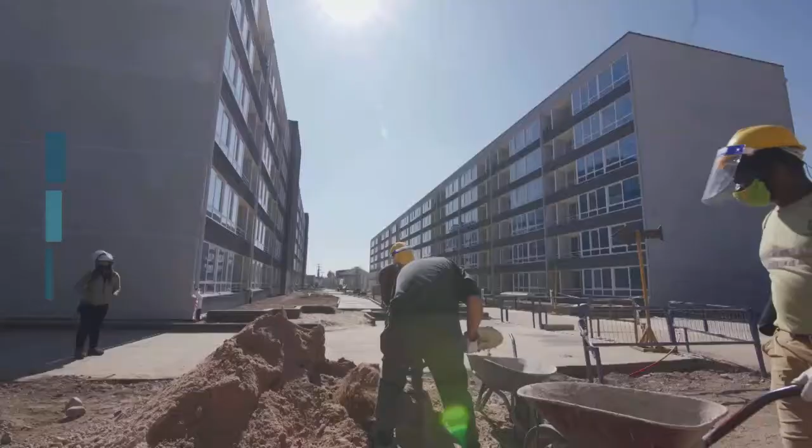The industry of construction is going through a process of change where both technology and more collaborative ways of working have a key role in facing the challenges of productivity in our sector.

That is why it is crucial to understand that we cannot achieve change without investing in updating the skills of our labor force. Both academic institutions and companies must focus on the competences, skills and challenges that lead us to Construction 4.0.

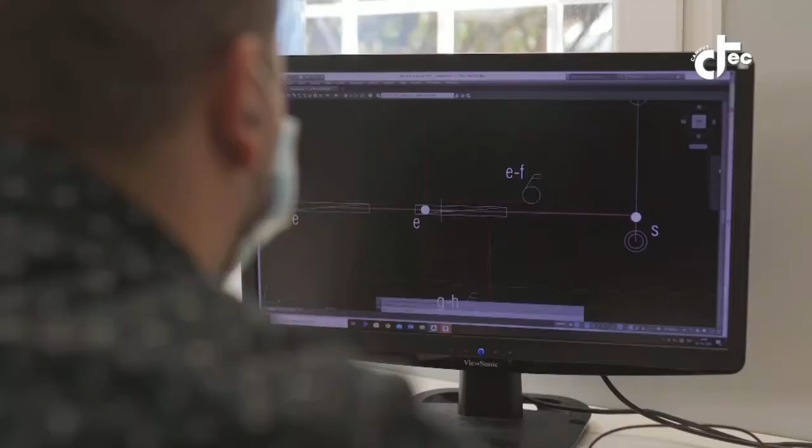This allows professional and technical staff to use technology to their favor, changing the way we currently work towards an innovation and ongoing improvement model.

We hope we can provide the leaps so we can train specialized human capital. Universities have a key role in this, including building capacities for innovation, development and professional training.

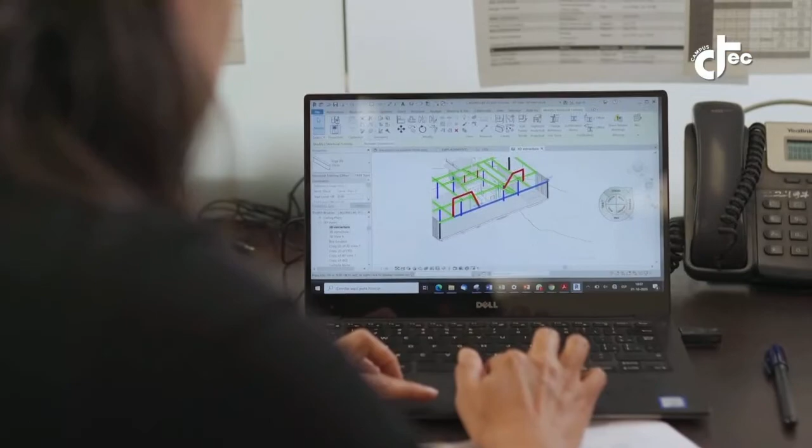The seven universities that make up this consortium are prepared for this change. I think it is a motive of great satisfaction for all of us.

The construction sector has a serious problem of productivity, and this is due to the low levels of training in the sector, both for workers and professionals.

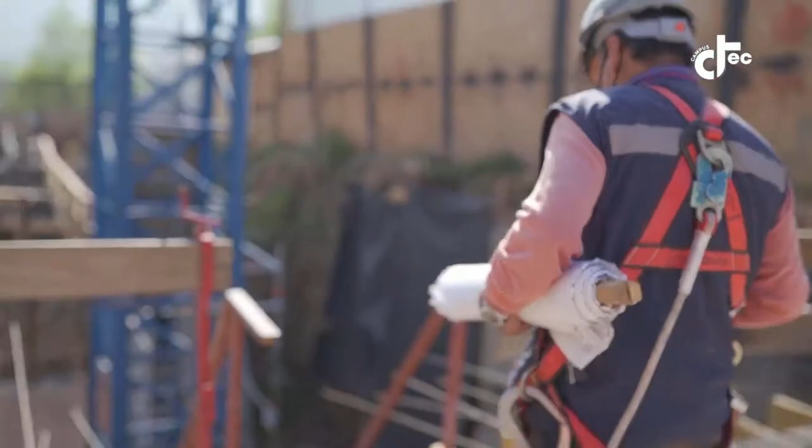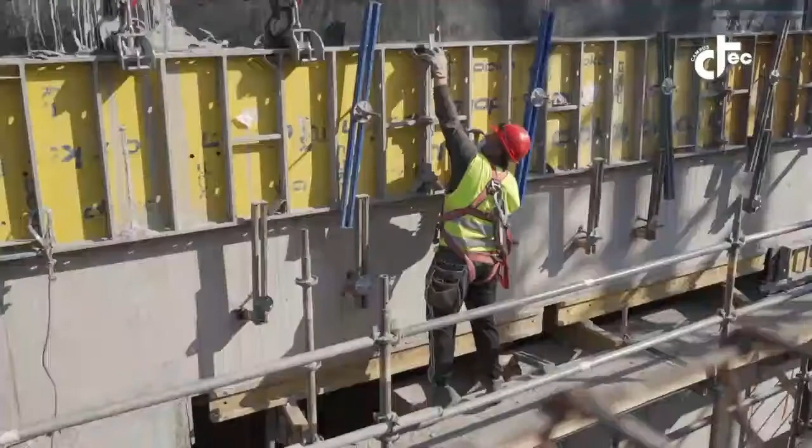In that regard, the Campus CTec initiative adds to a new program we're generating at the Chilean Chamber of Construction, where we want to offer partner companies different methods to generate ongoing education and training in different fields.

This will let us progress in productivity, industrialization, digitalization, the incorporation of new technologies, in the construction sector.

Through training, specialization training of high technological value aligned with the construction sector, to drive digital transformation and circular economy. To contribute to the challenges the construction industry faces in the years to come, CTech offers the sector a learning platform.

CTech puts at the disposal of the sector its learning platform, the CTech Campus. So I'd like to invite you to be a change catalyzer and be part of this.

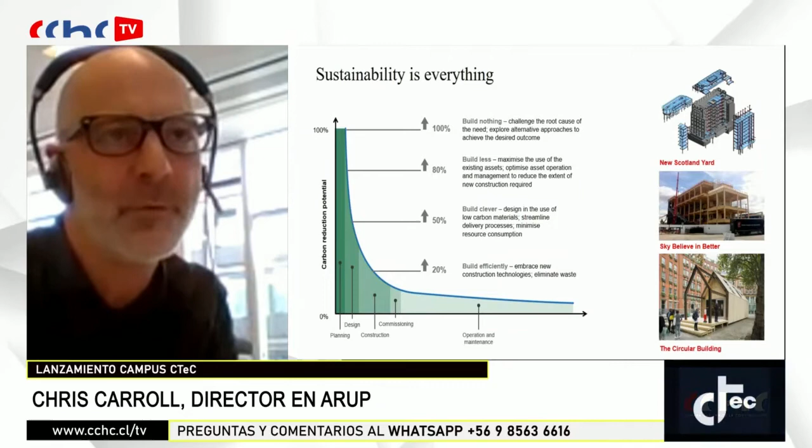Globally, buildings account for more than 38% of global emissions through the materials used to build them and the energy used to operate them. So this is a significant contribution that we need to make, and we have to start to think about different ways of doing things. So the concept of circular economy, which is where we keep materials at their highest value for the longest possible time - we have to start to think about this. Not just using materials and discarding them, throwing them away. We have to think about how we design to keep materials and resources in use, in perpetuity.

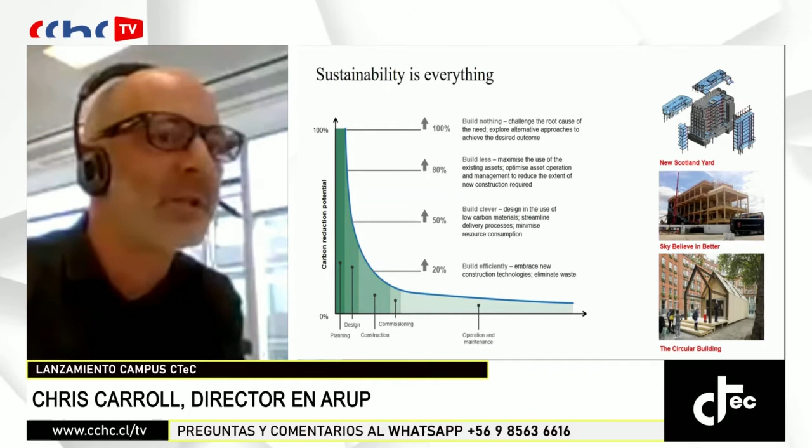So I'm a director at Arup, leader of one of the building engineering groups here in London. I've been at Arup since I graduated, so I've been here 30 years, and that's primarily driven by the type of firm we are and the type of projects that we get to do, and that's what's kept me here for so long. I'm a fellow of the Institution of Structural Engineers, and as per the introduction, I also am taking on a bigger sustainability role within Arup, as partnership director in relation to our membership of the World Business Council for Sustainable Development, which is a members organisation looking at how we decarbonise our building projects.

But the core thing I would like to say is although I've been here 30 years, the thing that keeps me here is the projects that we do and the collaborators that we work with, and being able to continue to innovate and create new projects year on year.

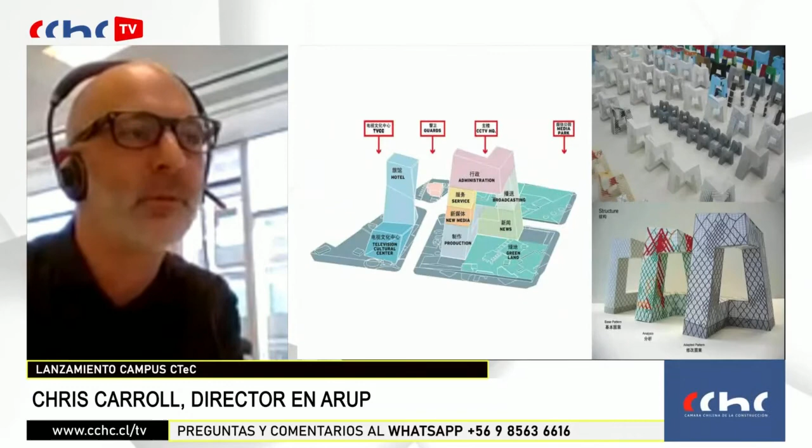One of my major projects, and I'll show some other examples, but one key example that really started me thinking about digital technology, innovation, and how we use that going forward, was this project in Beijing with OMA and Rem Koolhaas, the architects. It was for a new television center project campus called China Central Television, where it was 500,000 square meters of building - everything you need to produce television all in one building - and to be able to engineer it, these two towers of 54 stories high, connected with a 15-story linking piece that cantilevers 60 or 70 meters.

And to deliver this building, we had to reimagine what a building was about. So we had to look to use the whole form of the building, all of the geometry of the building, to provide strength and stability and hold the building up. But we also then had to look at using computing power to assess the way the building was performing in seismic and wind conditions and under its own loading conditions, and then tune that to put the material where it worked at an optimum.

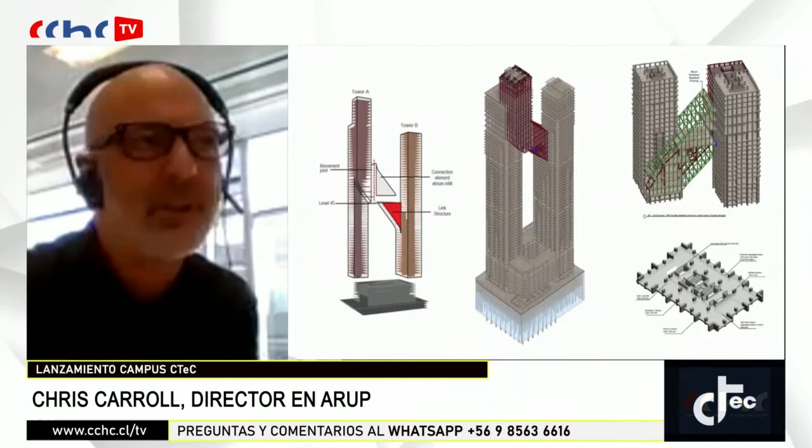The key thing here was to get that diagram right, so you limit the complexity. The form looked incredibly complex, but by cleverly thinking out the diagram, we could limit, understand, and ultimately simplify that complexity. On this building, we contained the complexity to the bridging link, and the rest of the tower we were able to deliver using very traditional Chinese construction techniques.

This is another Zaha project, which I think Loretta will also talk about—a science and research center in Saudi Arabia, KAPSARC. The important thing about the form of this building is that it's driven by the concept and a strong concept, and I think this is an important aspect of launching into any project.

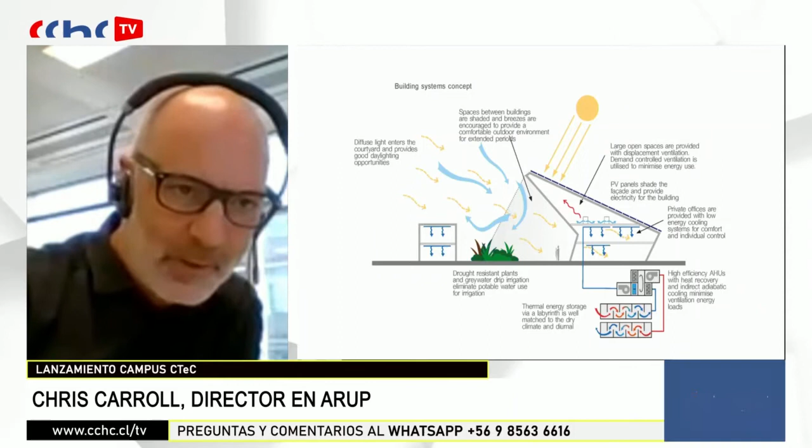This particular project's form is driven by the environmental performance of the building. It's about creating habitable, semi-outside spaces that are shaded. It's about channeling wind, collecting direct sunlight on the most effective surfaces, and energy efficiency. All of that is brought together as a concept and then informs the form, arrangement, and massing of the building.

As part of the design process, we have to fully understand the geometry we're dealing with, and importantly, the interrelationship between different aspects of that geometry. This is a bridge we're undertaking with Zaha Hadid's office at the moment.

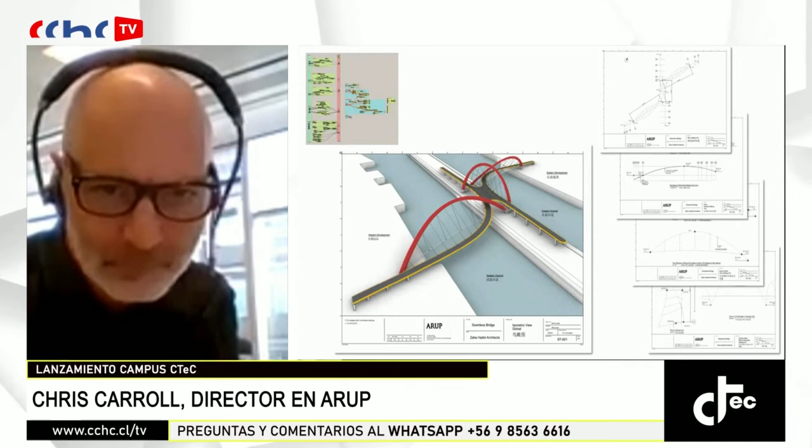The key is a tied arch bridge, and the relationship between the arches, the ties, the cables, the deck alignment, the abutments, and the bearings are all fundamental to its performance and efficiency. We need to control these parameters from the outset and balance their demands to achieve an optimum result.

Here we've used a Grasshopper script, a parametric script that links all of those elements together geometrically. It can then produce a three-dimensional model, which can be linked to our analysis software, which then connects to drawings and more conventional ways of describing the geometry. All of that forms a workflow and creates a rapid loop whereby we can test lots of design parameters in a very short period of time.

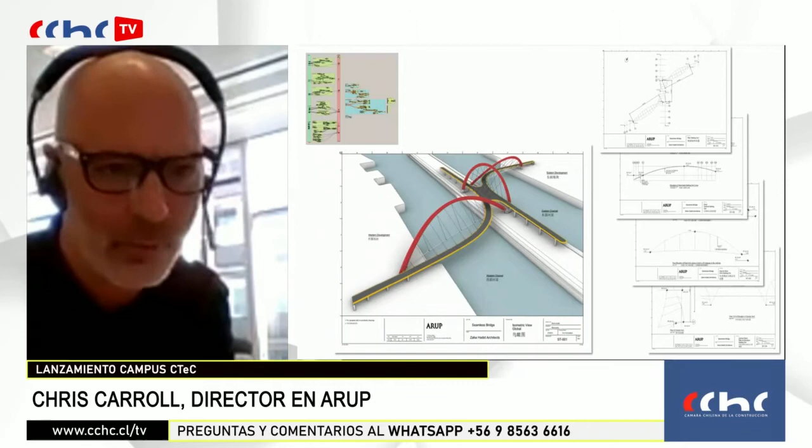We have to use geometry to deliver value. This is a project with Rem Koolhaas in Berlin that I worked on, with a very large glazed atrium. To put conventional glass systems into it, or to span the 30 meters to form that atrium structure, would have been very inefficient. So we adopted the form and made a kind of corrugation to reduce the material and make it more efficient. Again, software was important for that optimization, but the key thing was having a good concept and getting it right before we started the optimization process.

And how we bring all of this control of geometry and computing power to improve construction quality.

We've got to start to look to take as much of the construction process into a more controlled environment, so off-site, basically. Sites are pretty messy, uncontrolled situations, weather conditions, all that kind of stuff. So the more that we can build in controlled environments in factories, the better the quality and the construction process will be.

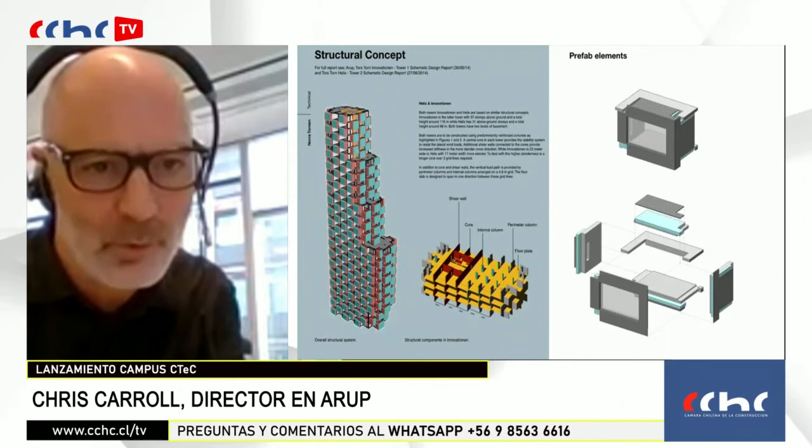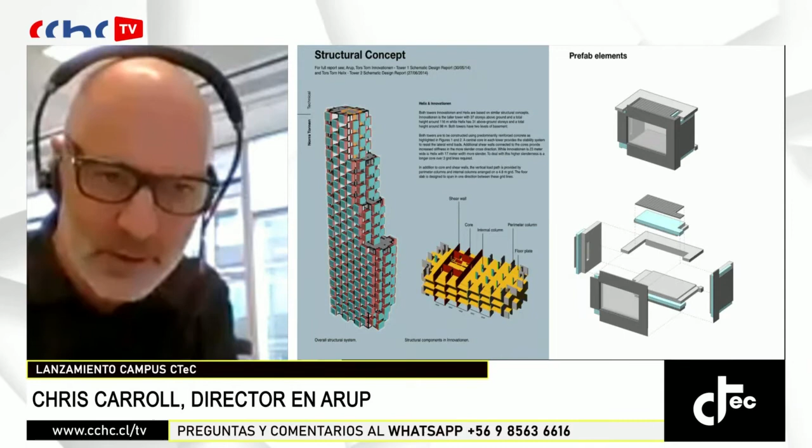So we worked out from the start how to make a structure and a facade from a modular panelized system of precast concrete pieces. The structure, the slabs, the beams, the columns and the walls are all precast, so we avoid any kind of formwork. But importantly, the facade also comes as an insulated precast system already glazed, and we worked out the precision of this.

Another aspect of delivering these projects is collaboration. There was a collaboration with the contractor SCF Beton and their engineers. We worked very closely with them to work out all the details, reviewing everything to make sure they delivered the structural performance and the continuity of the shear walls, and we worked out how all of this could be built as a series of prefabricated pieces, analogous to a Lego set.

Here you see the project on site. It was incredibly fast and efficient construction, with very few workers on site. This is a working day, and you see hardly any operatives as the panels come straight off vehicles and are assembled on site. They were cycling one floor of construction in less than 5 days, and importantly, that wasn't just the structural frame, but a fully insulated and clad shell in 5 days per floor.

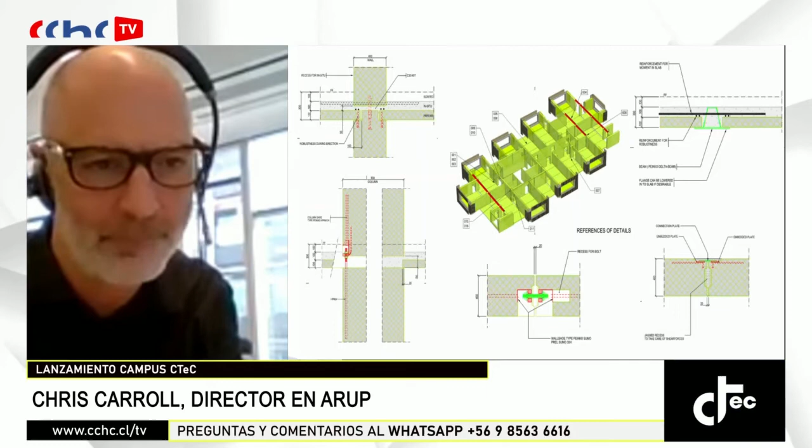There you see the construction and how clean the site is, with the parts that fit together. Very little site operation at all.

Now you see the two towers complete. The second tower was even quicker to construct than the first, and the idea that building is a process and not a one-off bespoke activity is something we should consider. There was a definite efficiency in building the second tower compared to the first, as the contractor learned the process and optimized it.

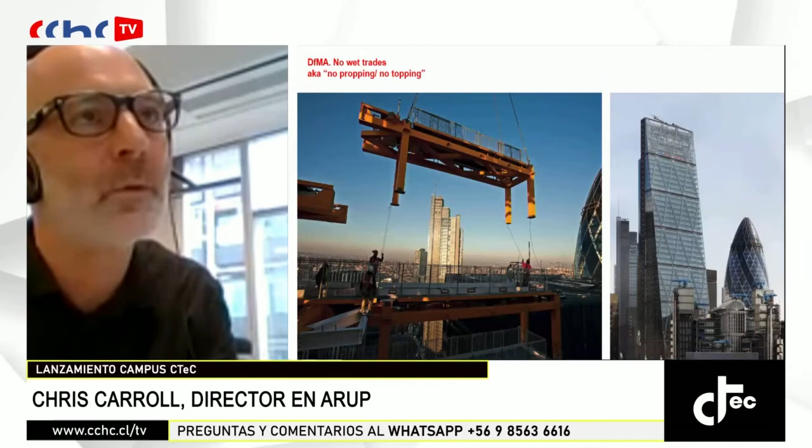This is a project in London, Leadenhall, also known familiarly as the cheese grater, built with the contractor Laing O'Rourke, whose philosophy is based on constructing as much as they possibly can off-site and bringing it in. They have a phrase, no propping, no topping, where they try to modularize everything. In this case, steel and precast concrete, and there was no poured concrete at all above the fourth floor.

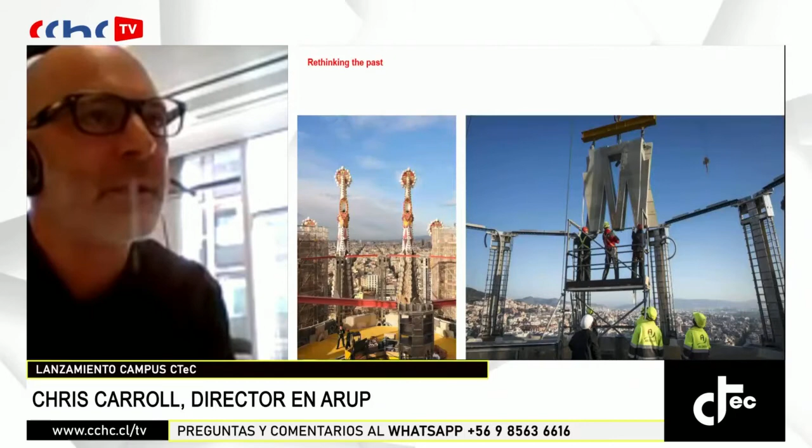This is a further example. We're also working on the Sagrada Familia refurbishment, and they want to speed up its final construction. It's in Barcelona, and it has taken 100 years to date, with a goal of finishing it within the next decade or so. They looked at using in-situ concrete as a way of speeding it up, and we've worked with the stonemasons to work out how to modularize traditional construction using post-tensioned and pre-stressed masonry units that can come onto site as a unitized system, be lifted into place in one action, and then grouted together.

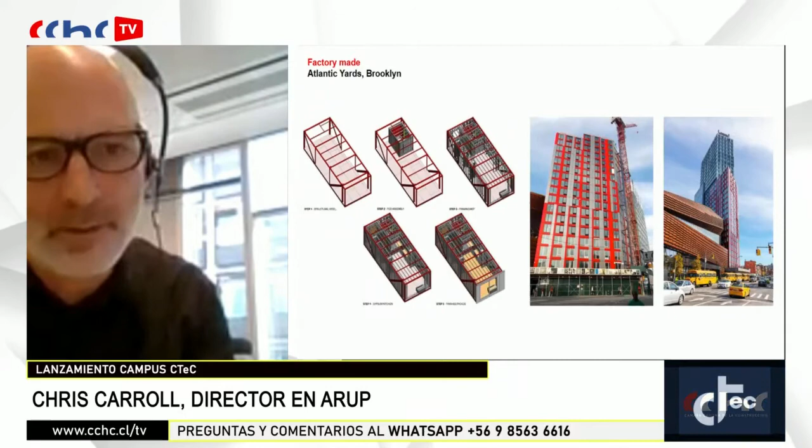Modular building taken to its full extent would be volumetric modules. This is a project in New York, which was for a time the tallest volumetric modular building in the world. These modules are fully fitted out in a factory, brought to site, and installed.

This is the BLOX building in Copenhagen, with the client Realdania. It's an interesting project in terms of how we think about the building grid, which is usually an arrangement of orthogonal frames made from beams, slabs, and columns. But this was a key city site that had been undeveloped for 60 years, as it was too complex a site.

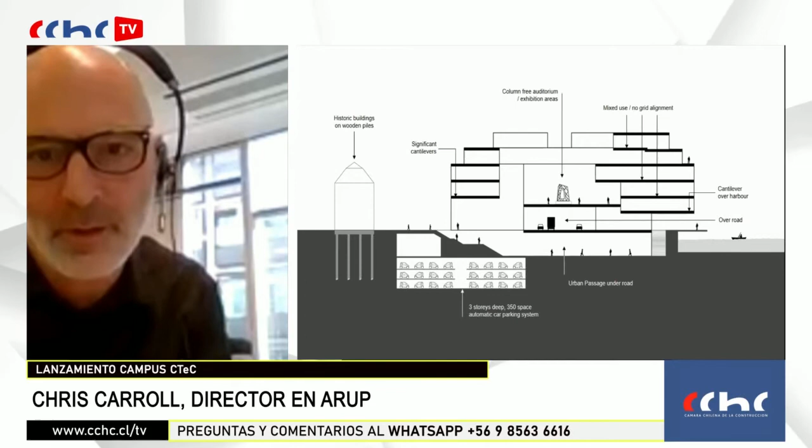It had many planning constraints, being in the historic part of Copenhagen. The building went underneath the ring road, over the ring road, and cantilevered over the dock. As a planning requirement, it had to have 350 car parking spaces, which meant an automatic car parking system. All of this led to a very limited number of places where we could put columns and a high level of complexity.

So again, we need to start with a basic diagram concept and get that right: simplify the complex and reimagine the grid.

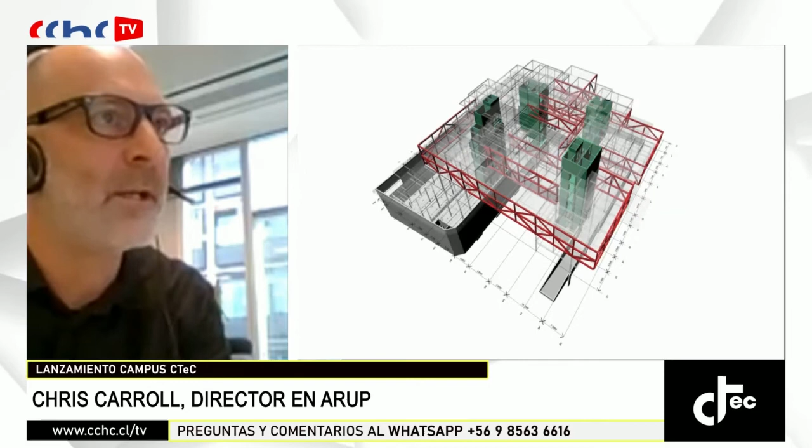We did that by coming up with the idea of 18 story-high trusses that occupy the building but create a framework allowing the rest of the building to be constructed using conventional techniques. These 18 trusses allowed the rest of the construction to be vernacular, adopting what the contractors were used to delivering.

To realize that, we had to use the full extent of the technology available and think of everything again. We simulated how we would construct the trusses virtually, so we could assess the stresses locked into them, and work through the construction sequence with the contractor.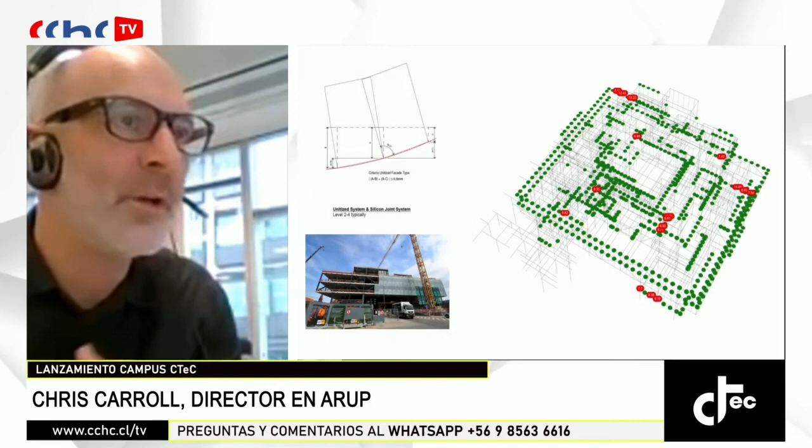We had to work with the facade contractor and write some specific bespoke software, a script that plotted all of the relative deflections at all of the gasket points under the different load combinations. Otherwise, the very large 4.5 meter high, 3 meter wide panels of glass wouldn't have fitted onto the building. So we had to adapt our process and write specific software for this project.

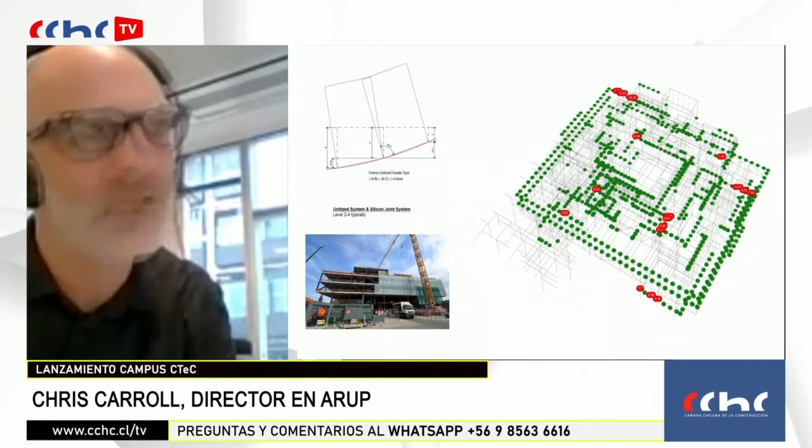We had to consider everything - how the fit-up of all of these complex load paths worked, how the tolerances were managed. All of that had to be done via virtual simulation of the actual conditions.

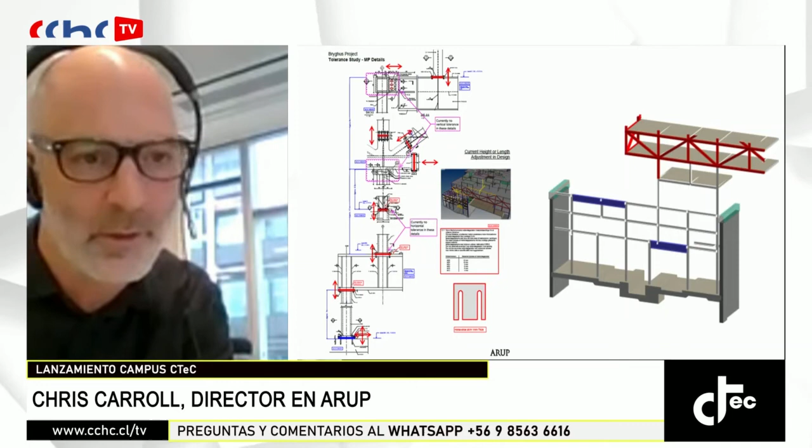Again, thinking holistically, as part of that concept we figured out how the environmental aspects of the building would work, how it would be a low energy building, how it would utilize the materials, daylighting, and as much free cooling from the district system as it could.

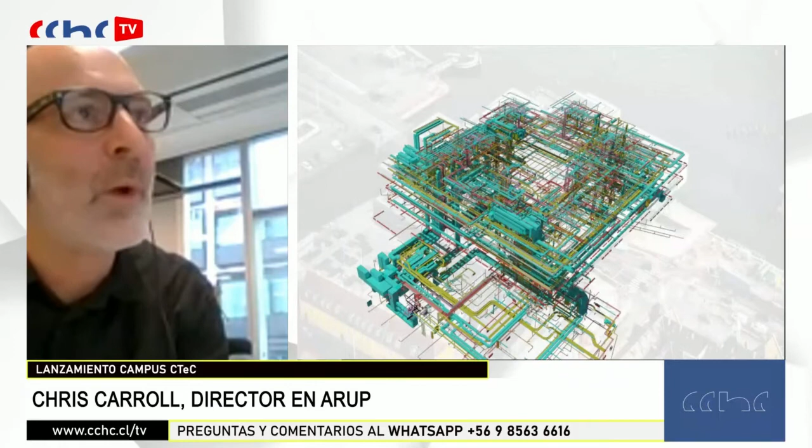The only way to realize this level of complexity was through BIM and a virtual twin of the building. We modeled every single pipe, cable, and wire, and their interaction with the structure, and how that all comes together in the building form.

This is the last project I'll show, but I show this because of the growing importance of technology and a higher level of technology in the built environment. This is 181 Fremont in San Francisco, a high-rise office tower, 800 feet tall.

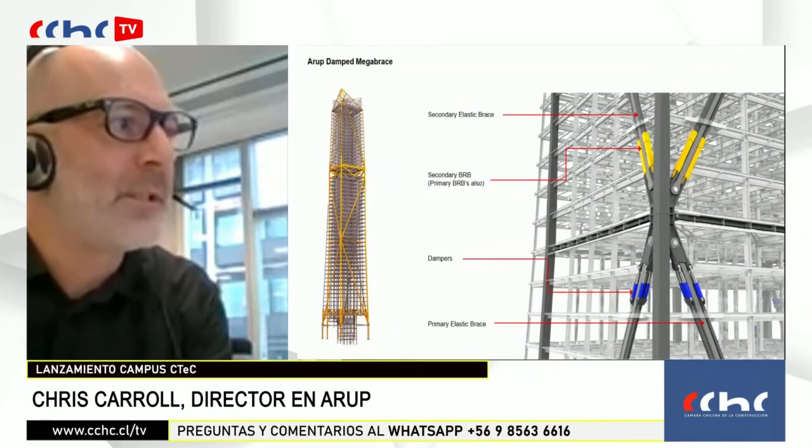To realize this tower in an efficient way that saved thousands of tons of steel, we looked to employ damping technology and energy absorption, using performance-based design rather than prescriptive code design, and engineered the building from first principles.

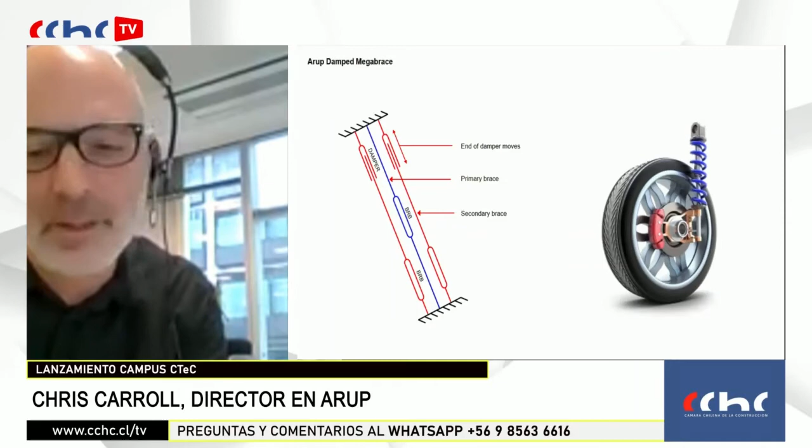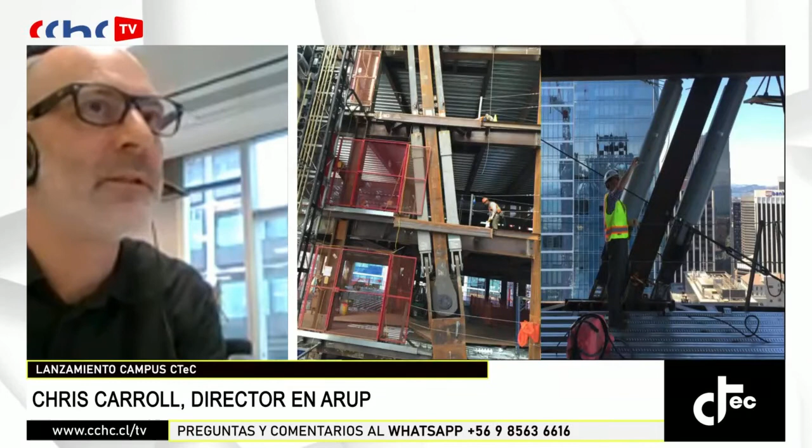We adopted the principles of a car suspension system in relation to how we would absorb the energy from major earthquakes. And that's the dampers in position.

We also employed lessons from the 1,000-year-old pagodas in Kyoto, Japan. The reason they survive is they rock on their foundations and lift up. So it's about thinking how you can deploy that ancient technology on a modern project. This building is designed to lift at its corners, but lift in a controlled way, and that again absorbs a significant amount of earthquake energy.

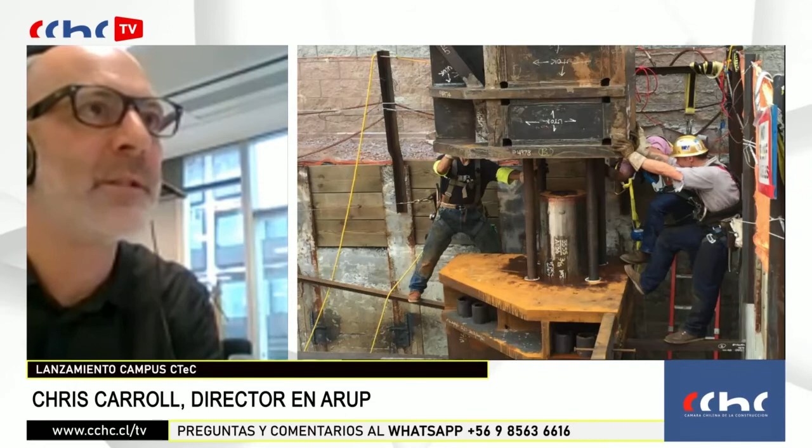And then you see the bearing at the base of that column. Next slide. And all of this is only possible because of the way we can simulate, in an accurate, non-linear way, how these materials and devices work in major events like earthquakes.

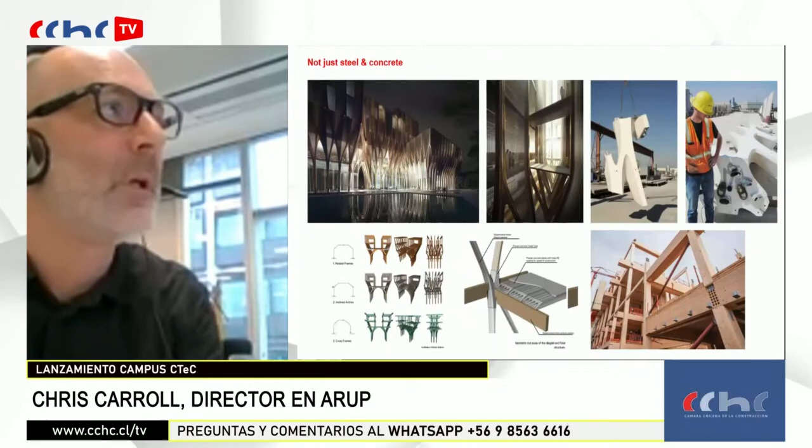Next slide, please. And finally, everything I showed was steel and concrete. Steel and concrete are the predominant materials in the world today. I read that we build a city the size of Paris every week globally, but maybe we have to start looking to use much larger quantities of other materials, maybe timber. This is a project in Cambodia we're doing with Zaha Hadid, looking at making a bespoke timber frame. The bottom right corner is a project we've done here for Sky, the television broadcasters, where we created their headquarters in a year using timber frame.

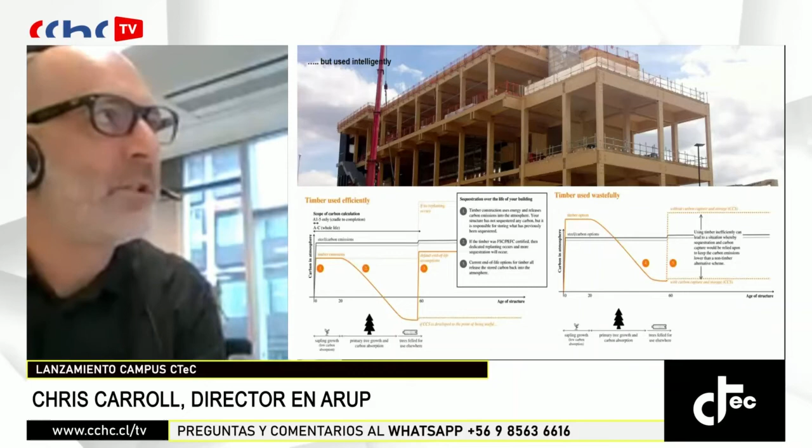Next slide, please. But it needs to be used intelligently. It shouldn't be a gimmick. Timber used badly can be worse than using steel and concrete. Also, if you don't consider what happens at the end of its life, timber in a landfill gives off methane, and if it's burned you have to think about the whole life cycle. So we have to use new materials intelligently, not in a gimmicky way, and probably compositely with a selection of other materials.

Last slide, please. So I'd leave you with these takeaway points, and you can make your own conclusions. From our perspective, sustainable development is now everything, given where we are in the world. I embrace the full potential of the digital era, but don't forget the clear diagram, the principles, the fundamentals of what you're trying to do. Keep exploring and enjoy the process. Thank you very much.

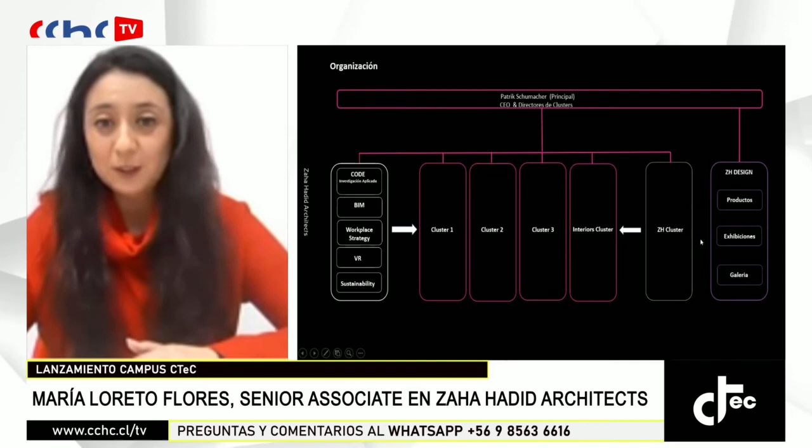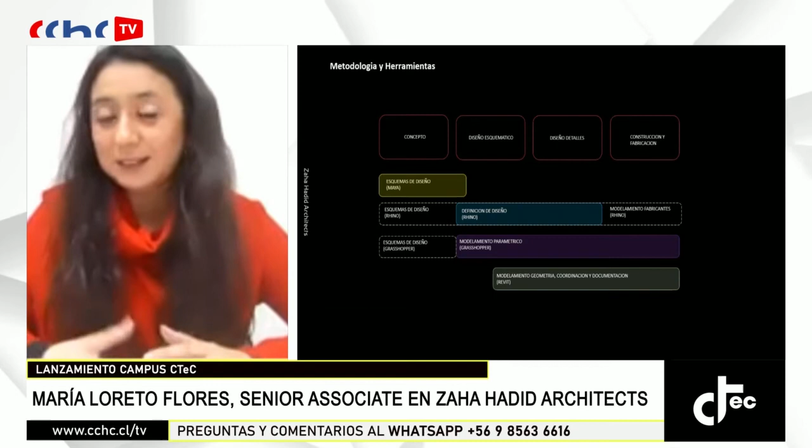And we've created some examples, and I believe we'll progress, and it's part of what the tool is enriching. When we create our own tools or definitions, many times we will provide them to the software for them to be included and for other people to use them.

So in general terms, the conceptual part is in our hands, and the local architect and local consultant provide us information related to the site, the place, and the regulations. But when the project is in the design stage or construction stage, of course, our local partners are the ones that require more responsibility in terms of the project.

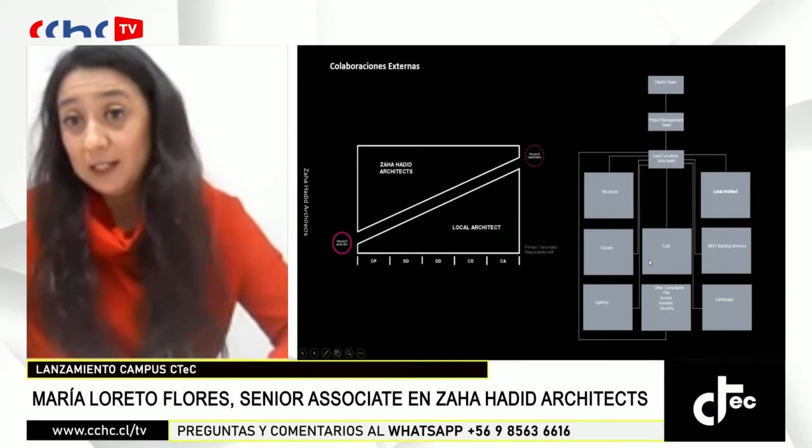In terms of organization and how we work with different projects, there are different modalities, but what we generally use is that after the customer and the manager of this type of customer hire us as lead consultant, and under our guidance, the rest of the consultants could be structural engineers, facade and illumination engineers, cost consultants, landscape artists, and the local architect. But that depends on the type of project and type of relationship the customer wants to include.

In terms of global collaboration, this is one of the models we're looking at lately in projects. This is the case of Morpheus, a project which I worked on since the beginning of its construction.

It was a global collaboration with teams in different time zones. We held meetings one time a week remotely. Part of the team was in Los Angeles, another part in Europe, in London and Belgium, and all the constructors and manufacturers were in Asia and China, which helped much in terms of mobilization.

In terms of innovation, the other component of these capacities needed using digital media. What is the advantage of using digital tools? One of them is optimization, in our case, of complex geometries. The use of digital media has made possible that our design, the geometries we're proposing that are not traditional, can be constructed, and the automation of processes would mean a reduction of time, resources, and costs, and sustainability, which we'll see later with two projects at the end of the presentation.

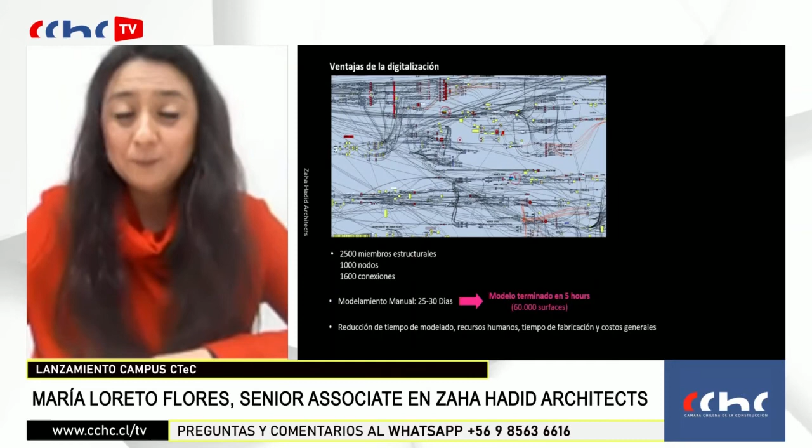When we saw the challenge of building this building, there were two options. One was to do the manual modeling, which took from 25 to 30 days for 2 or 3 people. The other way was to try to produce a parametric tool that allowed us to reduce time and also be able to exchange this information with the rest of the design team.

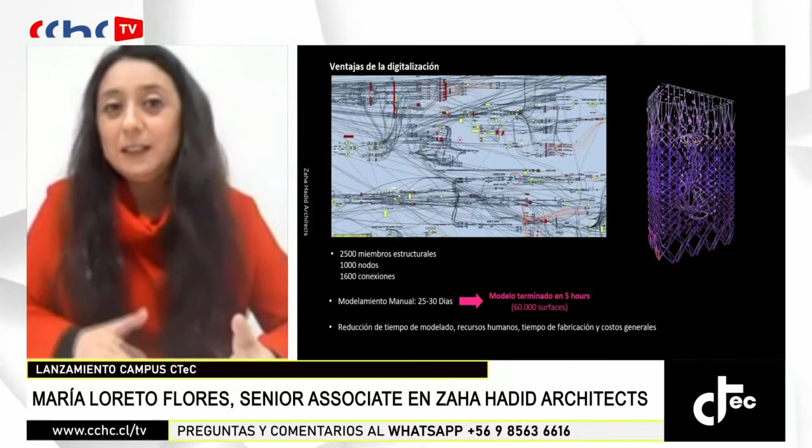This is an accelerated demonstration of what this digital tool did. This image illustrates the way in which we work and what we seek to achieve, and how digital tools are used in an intelligent and strategic manner in part of the design we need to do. This allows us to reach the final result and also lets us collaborate in the best way possible with the rest of the consultants.

Another example of this is the Heydar Aliyev Center in Azerbaijan. It is one of the most emblematic projects of Zaha, and it is, of course, the one with the most challenges in terms of geometry.

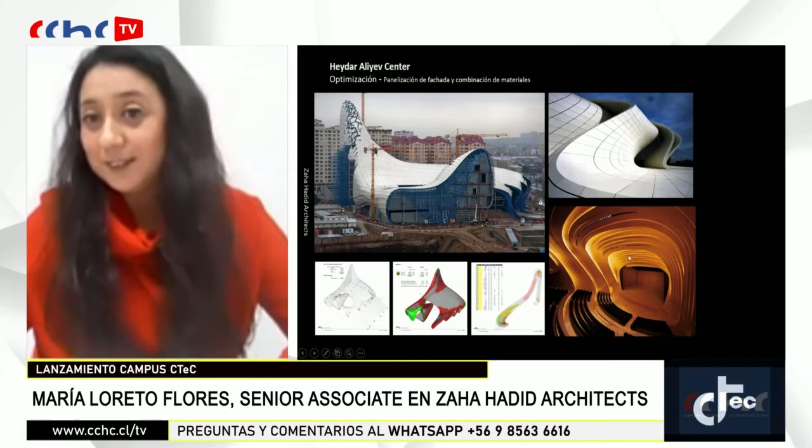There's a rationalization process, of course, in which the use of digital tools was critical for exteriors and interiors in terms of the panelization of the facade, and the design of the auditorium, which is completely in timber.

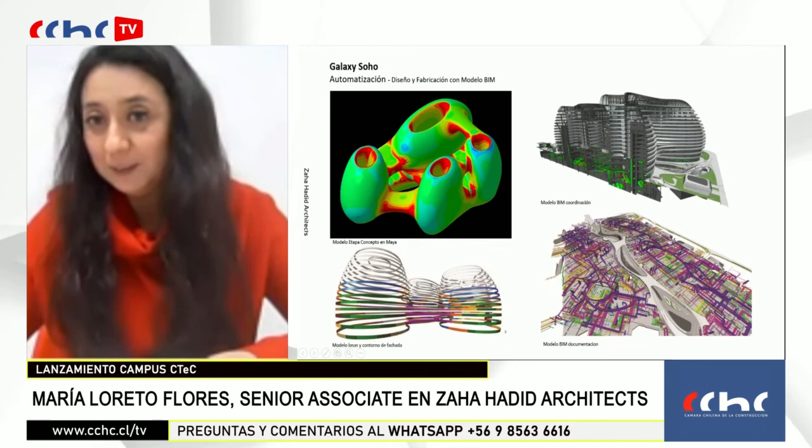The next stage was the construction of the BIM model, and then the coordination and provision of full documentation of this project, which was mainly done in CATIA and Digital Project.

Another important component is the mock-ups for conducting the facade of Soho China. It was very important to understand what the most proper material was for facades, what were the local capacities of constructors or manufacturers in this case, how much time that would take, and how could we as designers rationalize the facade so we could reduce costs.

There were 4 or 5 stages where we took the model and streamlined and rationalized the panels, which were double curvature in the beginning, and then we reached a percentage of 90% simple curve panels in some areas, and just the areas of bridges and connections between volumes, we used double curvature.

This is directly linked with working with the manufacturers, and that's the importance of the role of digital media, and of course of creating these mock-ups and reaching the result we wanted as designers and the customers wanted as well.

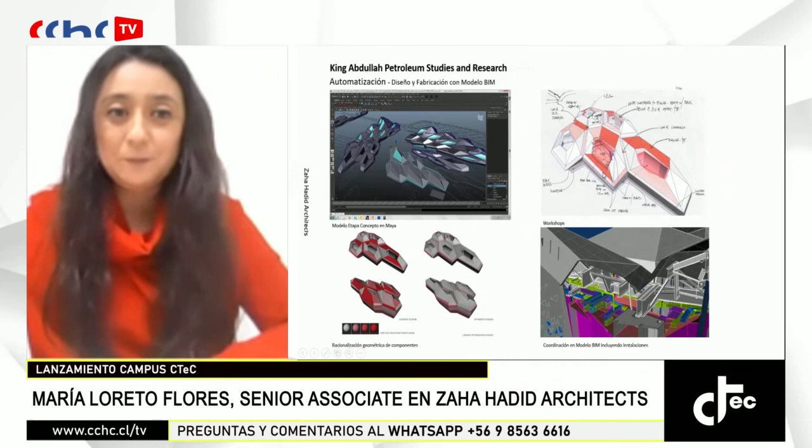I haven't spoken about what each project is from the point of view of the program, because I believe it's more interesting to focus on how things are done and show what we generally don't see, which is how we work and how each stage requires much thinking, rationalization, and innovation—new ideas, trying to see how we can respond to challenges and which tools we need.

In this case, we're showing how each cell of this project, which includes different workshops and research centers, responded to the predominant winds, the orientation, and how we calculated the openness of the facade to have natural lighting but also proper thermal gain, and the generation of interior yards that create shadows at some time of the day, making it quite comfortable to be outside in extreme climate.

Mock-ups are very important—the comparison between what we want, what we call the design intent, and how we conduct this in reality, working with the manufacturer's information they receive from us to do it as per what we imagined and showed to our customers.

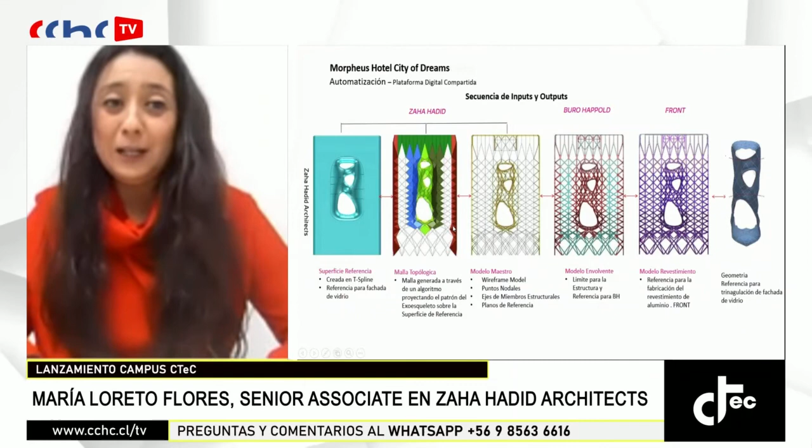Morpheus, City of Dreams, as I mentioned, is the project with which I initiated the second part of the presentation. The most interesting part is that it was a fully collaborative project. We created a digital platform where we, as designers, engineers, and manufacturers of the different facade components, were able to share the model.

We provided certain reference models that each of the different stakeholders could use to start manufacturing their part. We had the flow of work, which was agreed quite early in the schematic stage, and we also had participation of the constructor from the beginning. Therefore, the design was directly directed toward how it's going to be built.

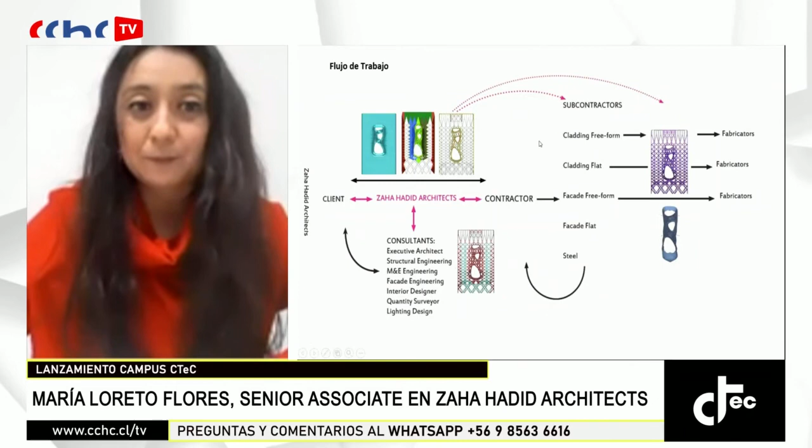This is the final image. Morpheus is a 5-star hotel in Macau, with 800 rooms distributed in two towers, connected with intermediate spaces, and the entire building is structurally supported by this external skeleton and the internal cores.

The quantity of elements that were precast or pre-manufactured in Shenzhen, China, was very important. They were made in China and transported. We can see images of the work, where they had the curve lining of the structure, where they built the macro windows, how these pieces reached the works, and the installation of the curved area of the exoskeleton and inside the building. This is the final result.

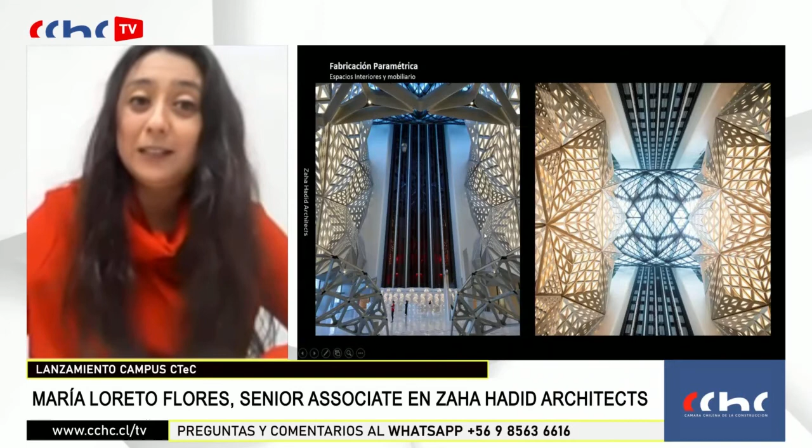Parametric operations were also used for the design of interiors. In this case, the main atrium of the building is a 40-meter high space, free with no columns, flanked by two internal facades that were also designed by our office, and at the other two extremes we have panoramic elevators that let us travel through the entire building, seeing the situation inside and outside as we process the voids.

There are two projects that are important in terms of sustainability, both related to sports events. The London Aquatic Center is a great example, also a collaboration with Arup.

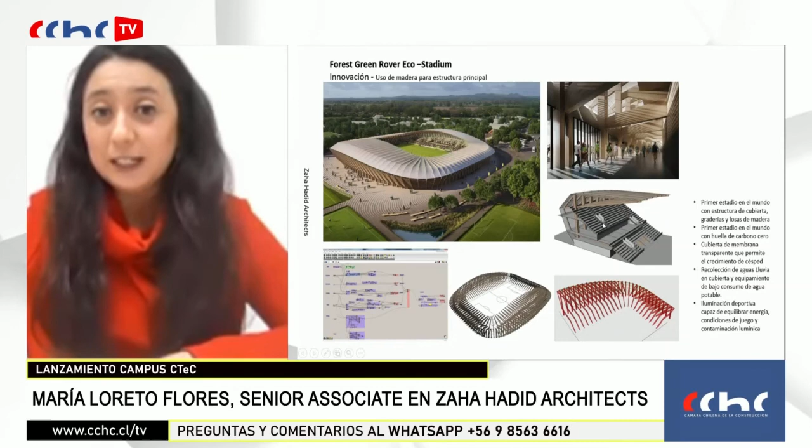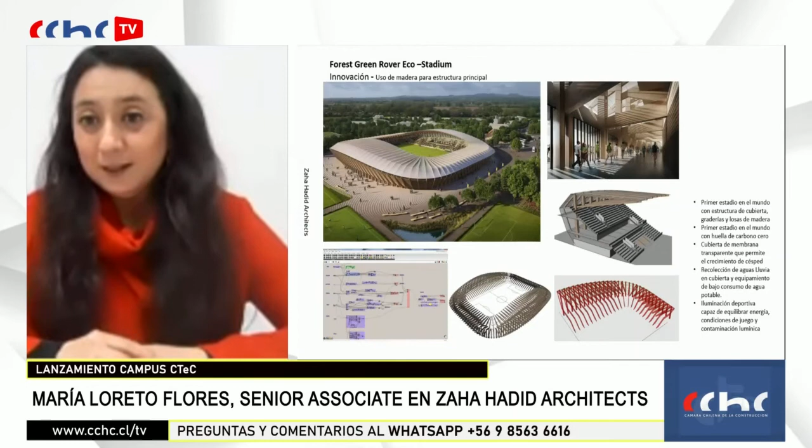Finally, this is a project that isn't built yet, but we hope to continue working on it in the office. We obtained the building permit not so long ago. It's the Forest Green Rover Eco Stadium, a stadium completely conceived in timber. It is part of an ecological park outside the city of Stroud.

It was designed parametrically, mainly because every time the dimensions of the structure should be modified, we also need to modify the angles. So the parametric tool is very useful to obtain fast results.

And we hope this research, which lets us use timber in the structure and the interiors, can be exhibited in the years to come as one of the first projects developed parametrically with a great sustainable imprint.

Thank you. This is my last slide.